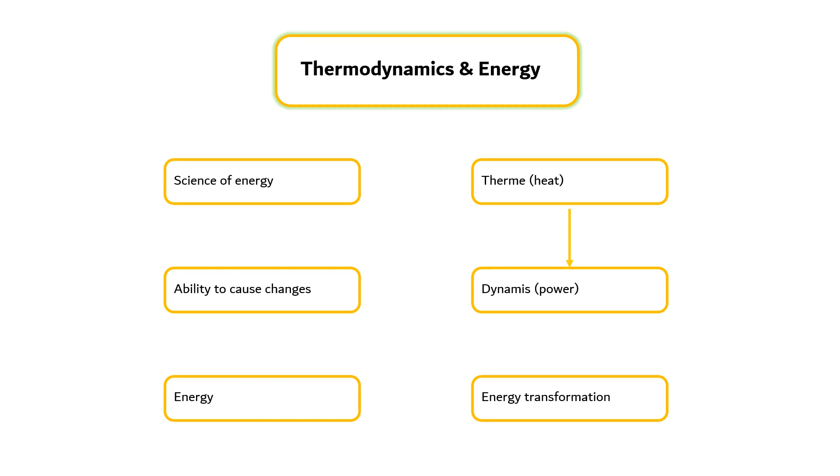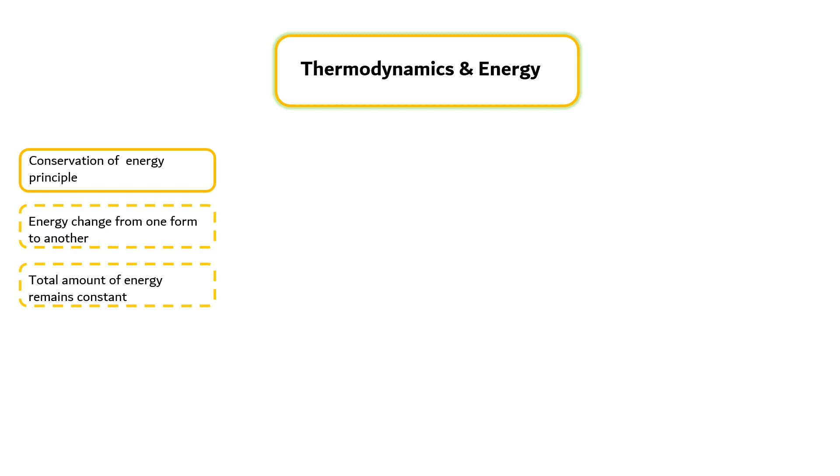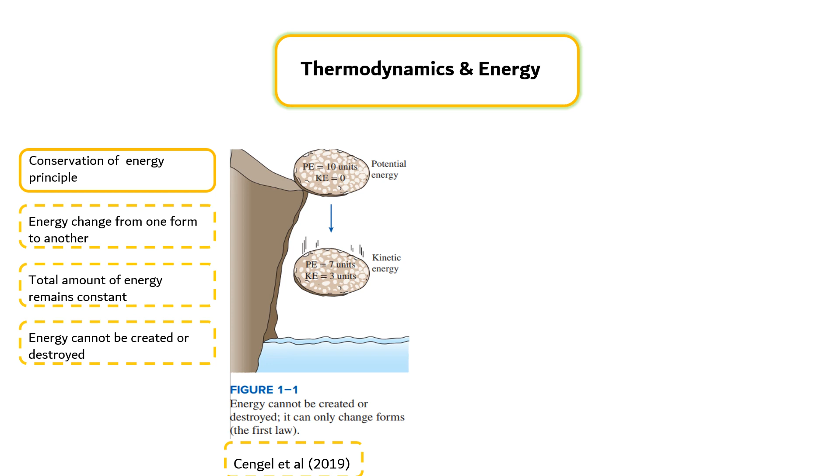One of the most fundamental laws of nature is the conservation of energy principle. It simply states that during an interaction, energy can change from one form to another, but the total amount of energy remains constant. That is, energy cannot be created or destroyed. For example, Figure 1 shows that a rock falling off a cliff picks up speed as a result of its potential energy being converted to kinetic energy.

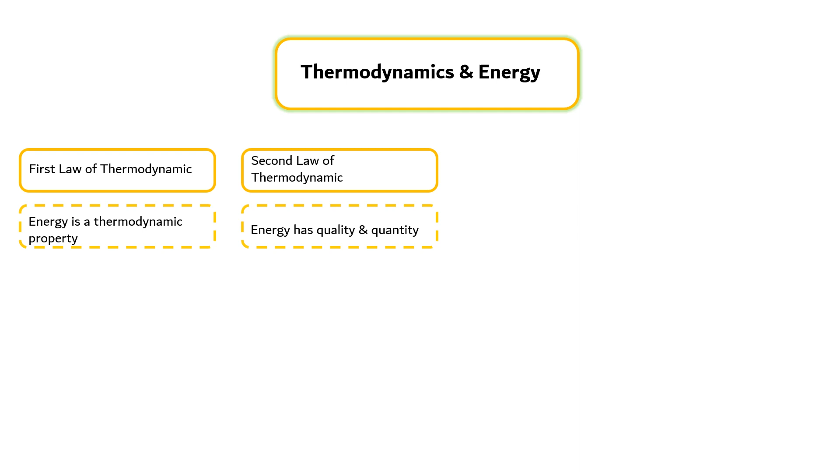The first law of thermodynamics is simply an expression of the conservation of energy principle, and it asserts that energy is a thermodynamic property. The second law of thermodynamics asserts that energy has quality as well as quantity, and actual processes occur in the direction of decreasing quality of energy.

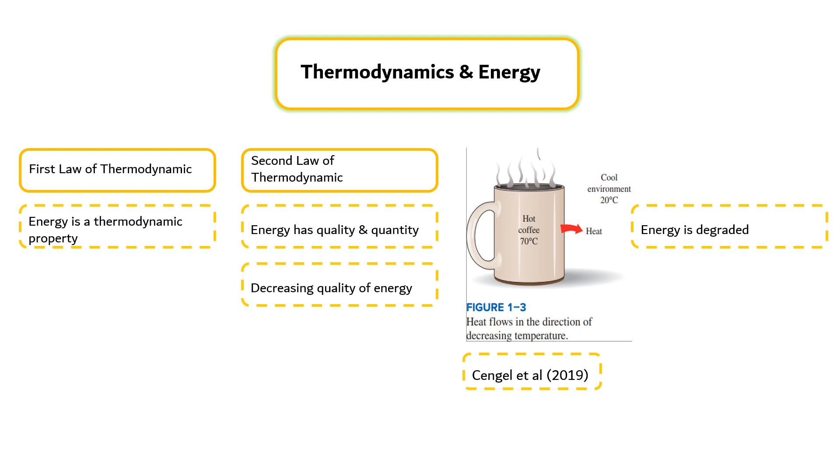For example, Figure 1.3 shows that a cup of hot coffee left on a table eventually cools, but a cup of coffee in the same room never gets hot by itself. The high temperature energy of the coffee is degraded or transformed into a less useful form at a lower temperature once it is transferred to the surrounding air.

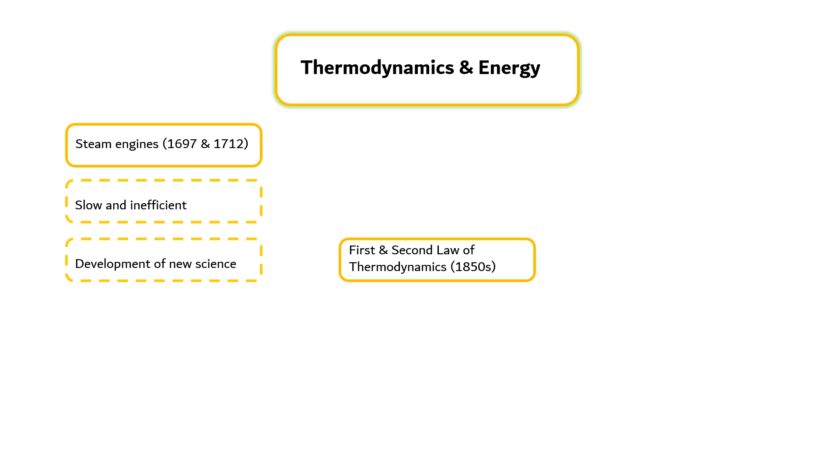Although the principles of thermodynamics have been in existence since the creation of the universe, thermodynamics did not emerge as a science until the construction of the first successful atmospheric steam engines in England by Thomas Savery in 1697 and Thomas Newcomen in 1712. These engines were very slow and inefficient, but they opened the way for the development of new science.

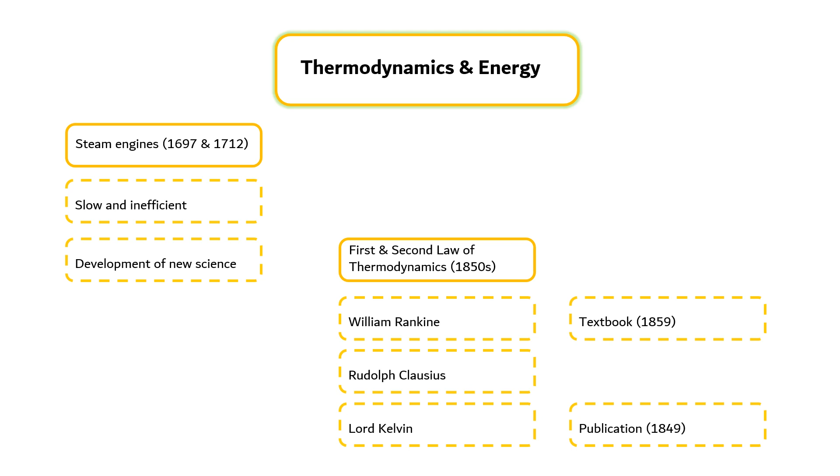The first and second law of thermodynamics emerged simultaneously in the 1850s, primarily out of the works of William Rankine, Rudolph Clausius, and Lord Kelvin. The term thermodynamics was first used in a publication by Lord Kelvin in 1849, whereas the first thermodynamics textbook was written in 1859 by William Rankine.

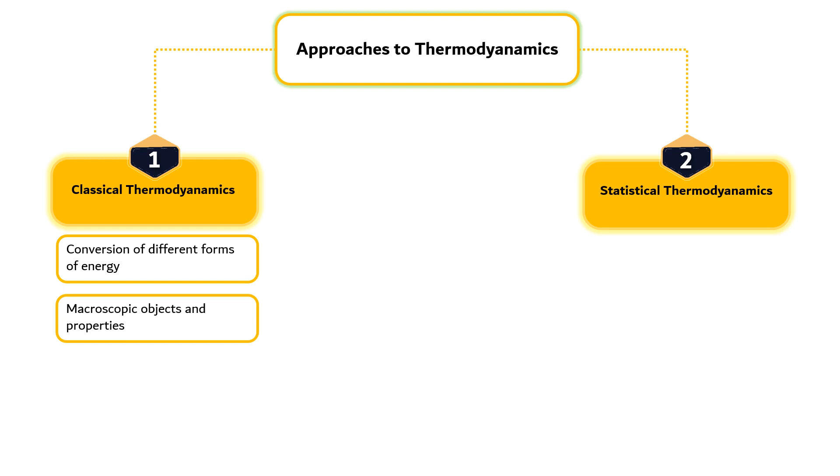There are two different approaches to thermodynamics. First is classical thermodynamics, which is a branch of physics concerned with the conversion of different forms of energy. As a phenomenological theory, it deals with macroscopic objects and properties that can be observed and measured in experiments. However, many questions remain open. For example, why do all gases behave similarly? What is entropy? It provides no information about the states or existence of molecules.

That brings us to statistical thermodynamics, which is a branch of physics that describes the thermodynamic behavior of macroscopic systems based on the properties of their molecular constituents. It gives thermodynamics a molecular interpretation and serves as a bridge between macroscopic and microscopic system properties.

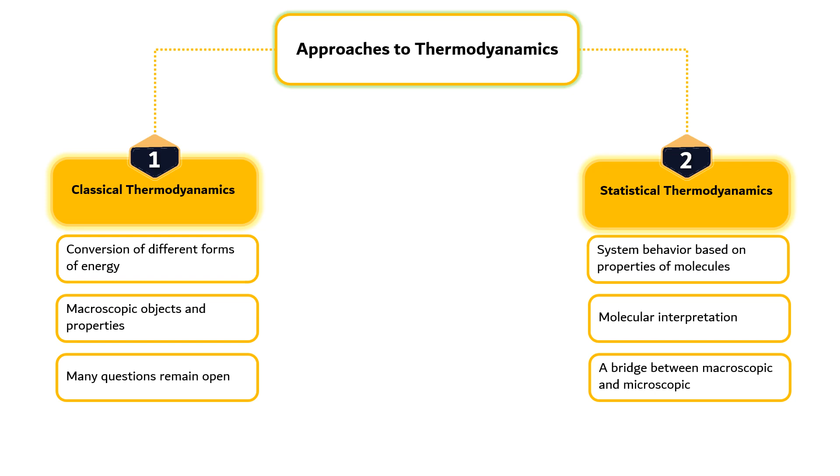All activities in nature involve some interaction between energy and matter. Hence, thermodynamics is commonly encountered in many engineering systems and other aspects of life. The heart is constantly pumping blood to all parts of the human body. Various energy conversions occur in trillions of body cells. Body heat generated is constantly rejected to the environment. We try to control this heat transfer rate by adjusting our clothing to the environmental conditions.

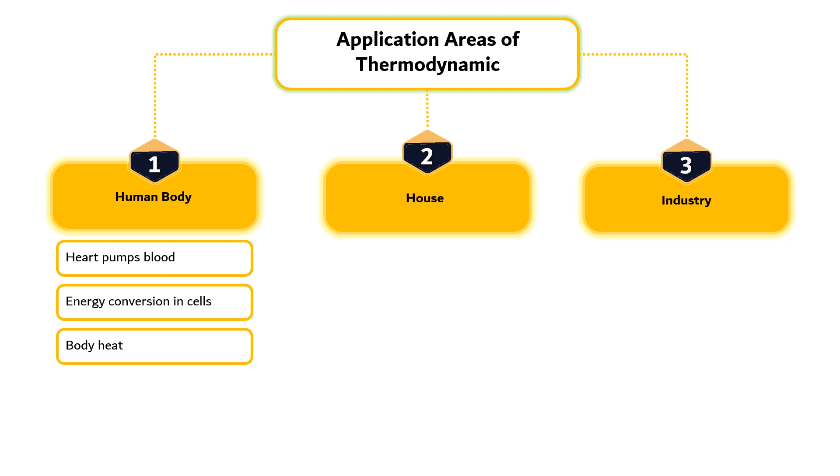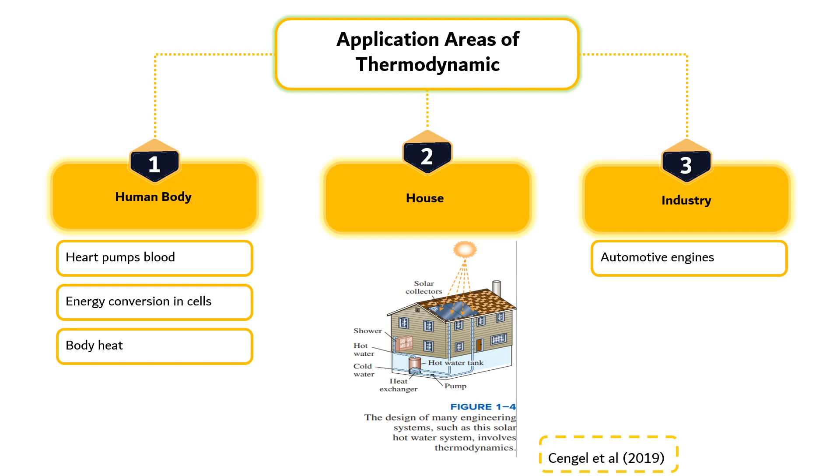For the next segment, we will discuss dimensions and units.